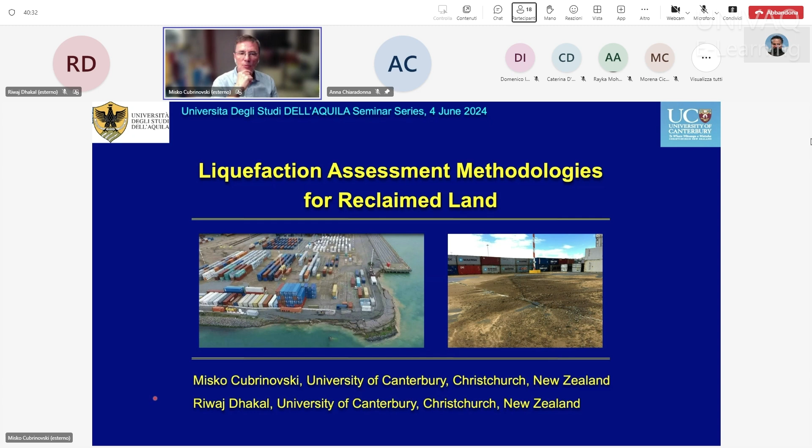Today, together with my colleague Riwaj Dhakal, we are going to discuss some of the observations from recent earthquakes in New Zealand and our studies associated with those, specifically the liquefaction assessment methodologies for reclaimed land.

As Anna pointed out, the presentation will have three parts. I'm going to provide a brief introduction of a case history, which is going to be the basis for this talk: the liquefaction that occurred at the Port of Wellington in a recent earthquake. I'm going to introduce the type of damages that occurred, and we'll provide some details of the composition of the reclaimed soils, which are really at the center of this study.

Then in the second part, Riwaj is going to provide a lot of details around our studies, first to explain the observations using simplified procedures, but then to identify key aspects in the assessment that engineers should really pay attention to. In the final part, I will try to provide some brief concluding remarks and allude to observations from other case histories and other earthquakes and the wider relevance of reclaimed land.

In the presentation, we will principally focus on simplified liquefaction analysis. We will briefly discuss advanced procedures, but most of the discussion will be around issues related to simplified assessment, and in particular we will address issues associated with complex fills, which have a composition of materials different from clean sand, and that poses a problem and challenge in the liquefaction assessment.

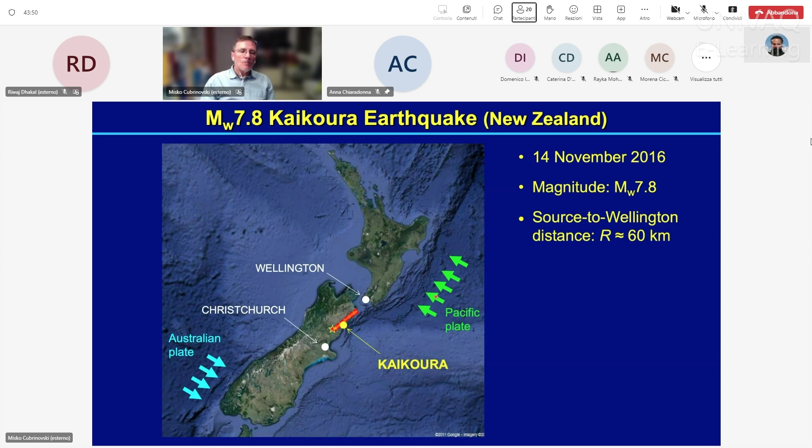Now we are zooming in on Wellington. This is part of central Wellington, and what we are seeing here is the port. This red shaded area is the Port of Wellington, and you can see a number of red symbols - those are strong motion stations where ground motions were recorded, including at this location of the port. This one here is another strong motion station closest to the Port of Wellington, called CentrePort.

Here you can see the horizontal acceleration time history recorded at CPLB. You can observe the peak ground acceleration is somewhere around 0.25 g, and we are seeing a reasonably long duration of strong shaking, exceeding 20 seconds or so, with a number of cycles. But the maximum and peak amplitudes are relatively moderate, so we would classify this as moderate shaking intensity in terms of amplitude, but of significant duration.

Top right, you can see acceleration response spectra for three different classes of soils. This black circle indicates a location which is on rock, essentially a rock or nominally rock site, and the black solid line indicates the response spectrum for the ground motion observed there. Relatively low spectral accelerations, with peak ground acceleration of about 0.08 g, just 8% of the gravity acceleration - a low acceleration on a rock site.

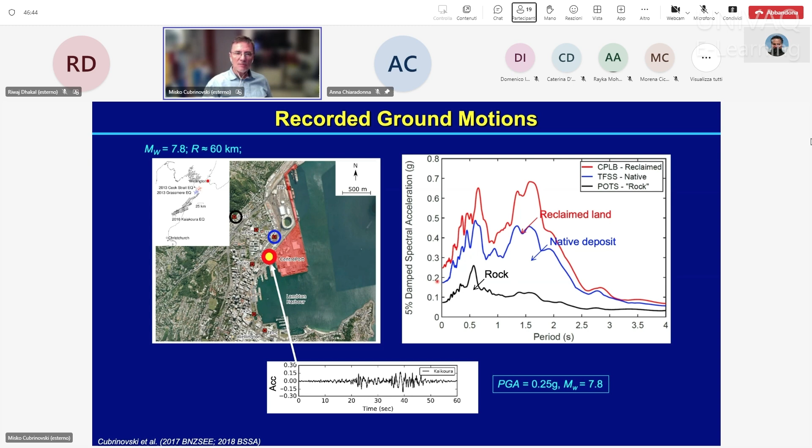And this shaking produced significant liquefaction at the port. Before I describe the typical damages we saw at the port, let me briefly introduce the land reclamation history at the port. This dashed line here indicates the coastline in the 1850s, almost 200 years ago.

Since then, reclamation efforts started and were performed in three phases. In the early periods, some small-size reclamation works were performed. Then in the early 20th century, more significant reclamation was performed, predominantly in this gray shaded area. In that period, hydraulic placement was frequently used, especially for this large area, but end-tipping of gravelly materials into the sea was the alternative method used for smaller reclamation works.

Then in the third phase, from approximately 1965 to 1976, this part was reclaimed, now known as the Thorndon reclamation. This is the thickest fill, and much of this discussion will focus on it. So in Wellington, along the waterfront, there is a belt approximately 200 to 500 meters from the current revetment line which is reclaimed land. On these reclaimed soils there is very significant infrastructure, and this is one of the most beautiful areas of the city, so clearly the performance of reclaimed land during earthquakes is extremely important for this city and for Wellingtonians.

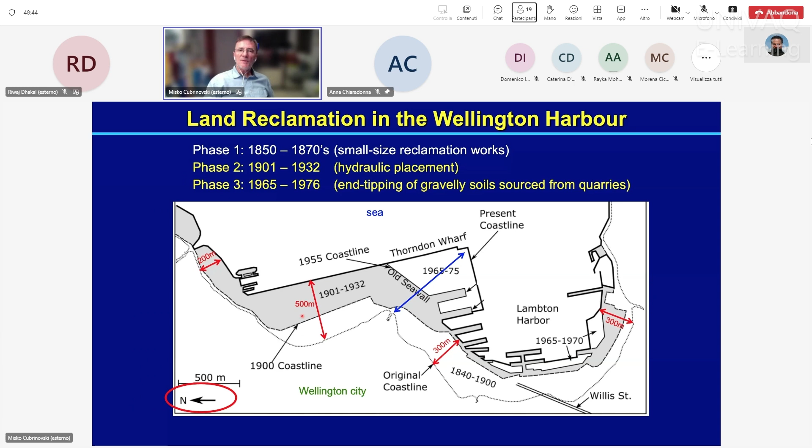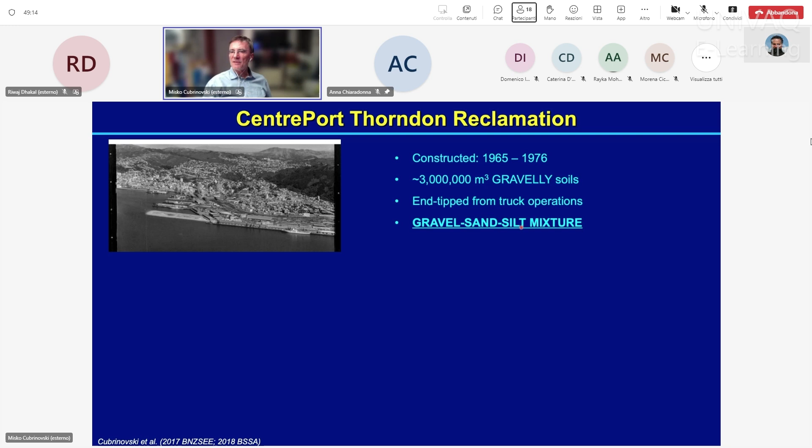So let's see what the construction of the Thorndon reclamation involved. You can see an old image from the time of construction - approximately 3 million cubic meters of gravelly soils were dumped into the sea through truck operations. Local materials were used from nearby quarries, which were essentially a gravel, sand, silt mixture. So the material was just dumped into the sea, and this kind of reclamation fill was constructed, as indicated here.

On three sides of the reclamation there is sloping ground - actually there is no retaining structure, just a slope of 1.5 or 2 to 1. So modestly, gently sloping ground on three sides of the fill.

On the northern side is confinement provided by an old retaining structure. This Thorndon reclamation, composed of gravelly soils, is quite thick, from approximately 10 to 20 meters thickness. It is essentially laterally unconfined except for the northern side, and it is not compacted because the soils were simply placed under the sea.

When the soils surfaced above the seawater, they used rollers to compact the top 2 or 3 meters. This orange layer represents that compacted surface soil. The yellow layer is the gravel sand silt mixture, which was not compacted. As Riwaj will show later in detail, the reclamation is mostly composed of this gravel sand silt mixture, but there are also zones where relatively cleaner sands were used. This blue area indicates such a sandy zone.

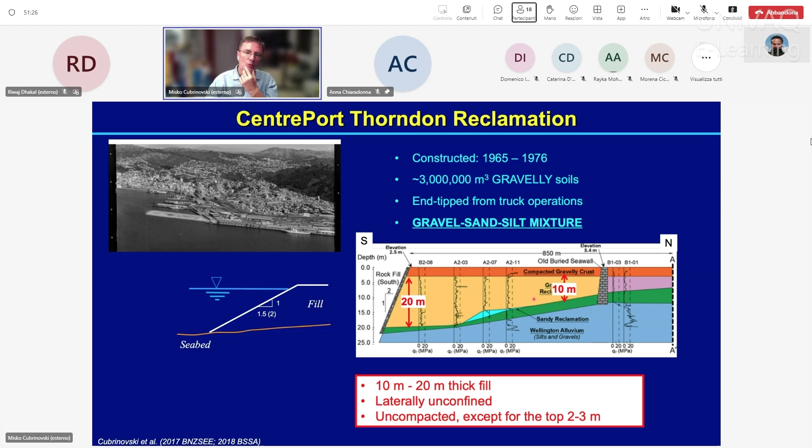The green layer is the marine sediment, the original native marine sediment layer on top of which the fills were constructed. The blue area is the zone of native alluvial soils, interbedded gravelly, silty and sandy layers that propagate towards deeper parts of the strata. These are the essential characteristics, and we'll focus mostly on the performance of the Thorndon reclamation fill, especially the performance of this gravel sand silt mixture.

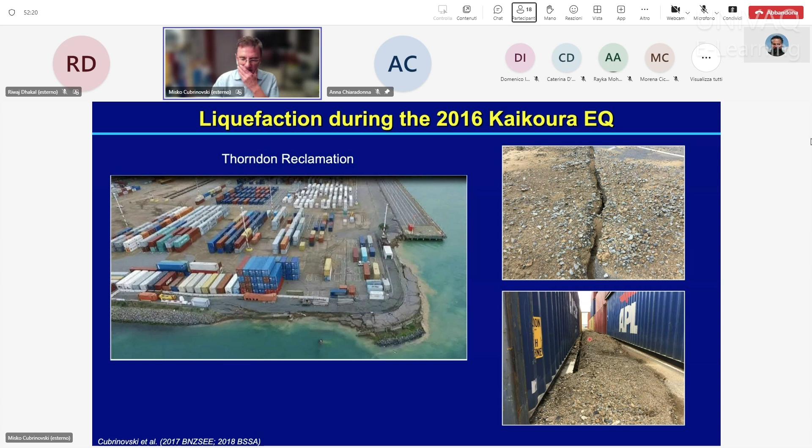A close-up view shows the ejected material is really a mixture of larger particles, gravels, sand, and silt. Typically, the ejecta occurred close to cracks or drainage pathways that provided an easy route for the ejecta to reach the ground surface. You can see a pile of ejected material along the containers at the port.

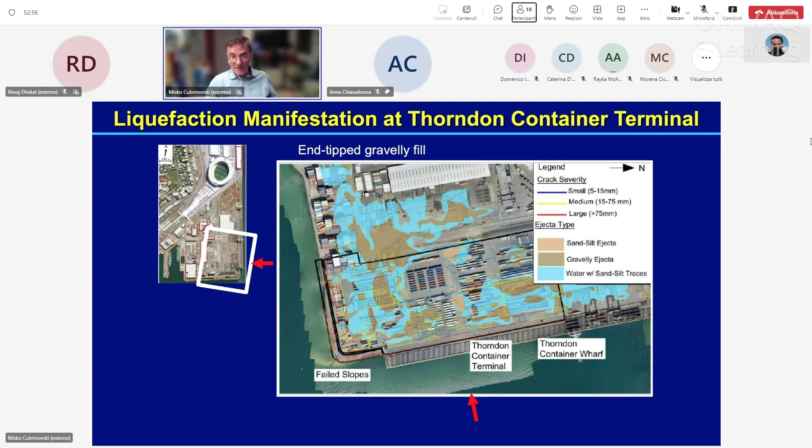This is an aerial view of the Thorndon reclamation, schematically indicating how liquefaction was manifested. The blue painted area is covered by water, the brown painted area is covered by gravelly ejecta, and the light brown is covered by sandy ejecta. At a couple of locations, sand was the dominant ejecta material, and these are areas where in the deeper part of the fills there is a prevalence of sandy soils, which is why we see sandy ejecta there.

Let's see now how liquefaction was related to the observed damages, using a simple schematic to indicate what happened. This is the pre-earthquake geometry. Due to elevation of excess pore water pressures and reduction in effective stress in the fills caused by liquefaction, there was significant loss of stiffness and strength, and as a consequence, large movements and displacements were seen.

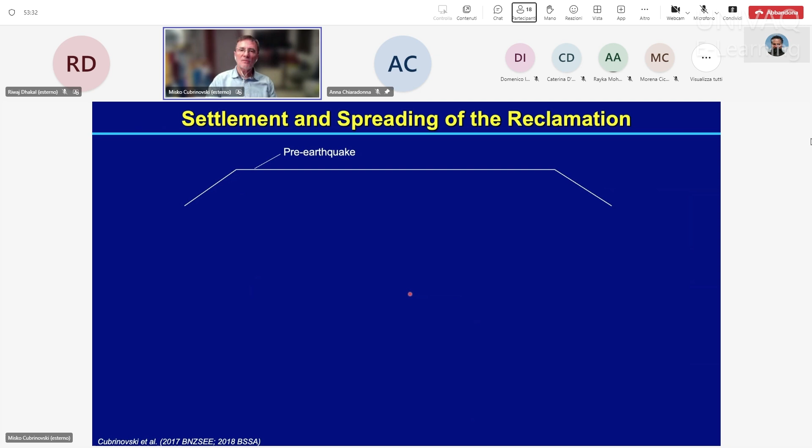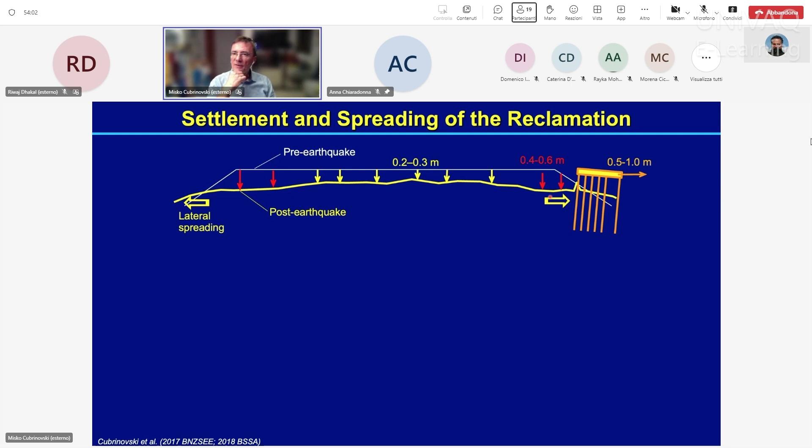A key deformation pattern shows settlement of the fill: approximately in the center part it was about 20 to 30 centimeters, and close to the edges it was half a meter or even more. This slumping due to liquefaction in the fills was also associated with lateral movement, so lateral spreading occurred towards the sloping ground, and this pushed the wharfs, which were supported on piles, half a meter to a meter towards the sea.

You can see the offset created between the settled reclamation fill, indicated by yellow here, and the top of the wharf, which didn't settle much because it's supported on piles - this offset was quite significant. Here is the interface: this is now the surface of the wharf, and this is the surface of the reclamation. Obviously, before the earthquake, that was level ground.

So quite significant damage was induced at the port. The port was out of operation for a while. The gantry cranes, which you cannot see but are on top of this wharf, were out of operation for 10 months. As a critical facility servicing the capital of New Zealand, that was a quite significant impact due to the liquefaction induced in the reclamations of the port.

What you're seeing here is the distribution of ground displacement due to lateral spreading. On the vertical axis is the magnitude of ground displacement in meters, and on the horizontal axis is the distance from the edge of the reclamation. So from this point, we're moving to the right, for example, about 200 meters.

You can see that the displacement at the edges was somewhere from half a meter to a meter. These are summary results from measurements at four different locations. You can see a gradual reduction of the horizontal permanent displacement due to spreading. The spreading affected an area of approximately 100 meters with very significant displacements, and further up to 250 meters.

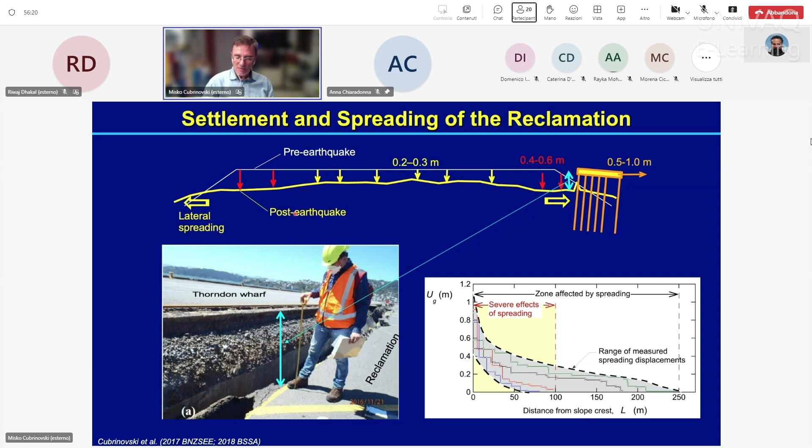Smaller displacements due to spreading were observed, and this is kind of typical. When liquefaction is associated with spreading, we see damage typical for both loss of stiffness and strength, affecting different foundations, producing a lot of settlement, and lateral spreading imposing very large lateral displacements, which additionally damage the land and structures. So these are some typical damages.

Top left is a schematic view of the cross-section of one smaller building on shallow foundations, which was in the spreading area. As indicated here, the spreading produced a stretch of the ground of approximately 30 centimeters, with pretty much ruptured and extended the foundation at the foundation level, producing some structural damage as well.

Top right is a view of the top of the piles of the Thorndon Wharf, where you can see substantial damage occurring just beneath the deck at the top of the piles.

Down to the right, you can see an area of a building, part of a building supported on piles, this one to the right, and the reclamation area is where the original reclaimed fill is. You can see an offset of approximately 0.4 meters. Obviously before the earthquake this was level ground, so this was a typical manifestation of a large vertical offset between the pile-supported area and the reclamation, which suffered quite significant settlement due to liquefaction.

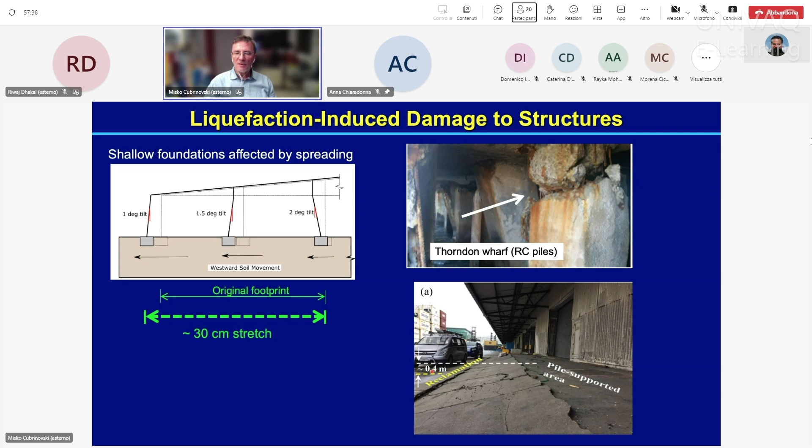So this is just a brief introduction of the type of damages that we were seeing at the port. Before I give the word to Riwaj to continue, let me introduce some important aspects to consider in the assessment of the type of soils that we encountered at CentrePort.

I will start with some general remarks about how we assess liquefaction in the profession using the simplified method. We use empirical relationships, and you can see such an empirical relationship shown here by the black line. This is a CPT-based empirical relationship that allows us to estimate liquefaction resistance of soils if we know the cone tip resistance.

If we perform a CPT, for any given depth we can calculate this parameter, which is the equivalent clean sand cone tip resistance. If we know that value, let's say it is 100, we can go to the intercept with the black line and read off the liquefaction resistance, which will be CRR, roughly 0.15. So for a layer with that QC1NCS, we estimate the typical liquefaction resistance. This is how we use the relationship in a simplified assessment.

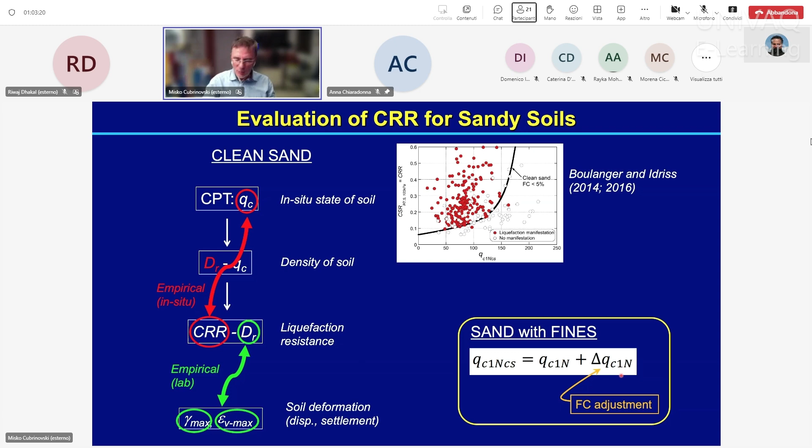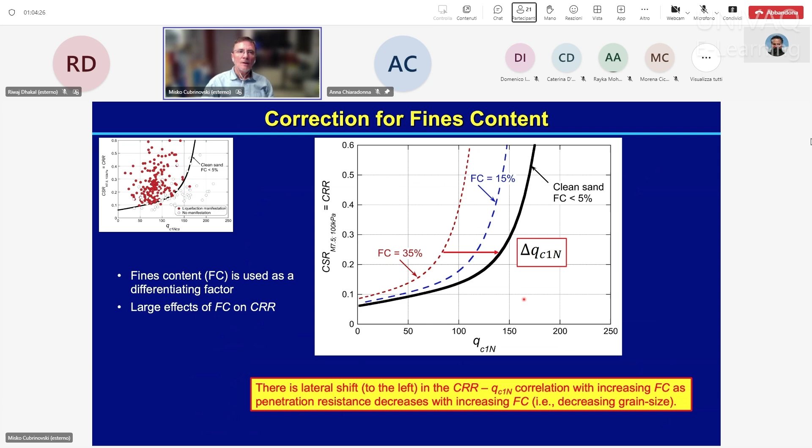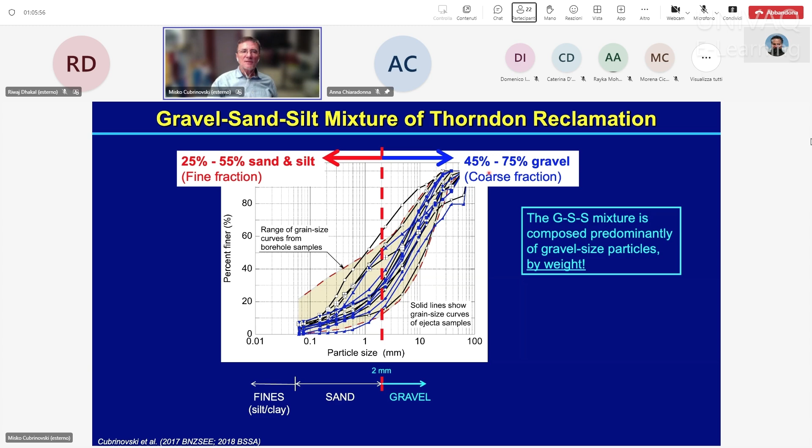So this is one issue: how are we going to deal with this difference in materials? As I mentioned, we have established procedures for clean sands and sands with fines. If we are dealing with a gravel, sand, silt mixture, we should expect several important effects of this material. The first is on the packing of soil—what will be the role of gravel in the sand silt mixture? Which fraction is going to dominate the material? Is it going to be the gravel, so we see liquefaction resistance typical for gravelly soils, or is it going to be the sand silt mixture? That is a very important question, and we will be focused on that.

The second is, once you have large and smaller and even smaller particles mixed together, they all show different penetration resistance, because we know grain size affects penetration resistance. So the next question we have to consider is how this composition of soil is going to affect penetration resistance. That is quite an important question, because we use penetration resistance to estimate density of soil. Since liquefaction resistance is directly linked to density, clearly any change in penetration resistance or change of density will implicitly imply an effect on liquefaction resistance.

So in our studies, we try to address these following questions, and Riwaj will shortly provide many details around those. First, what is the controlling fraction in the soil matrix? Is it the gravel or the sand-silt mixture? Second, the effects of soil composition on penetration resistance, and what will be the consequent effect on the estimate of the in situ state of soil, or the estimated relative density of soil. Finally, we were trying to see what effects considerations of those, or lack of considerations, are going to have on the computed liquefaction resistance when we use simplified procedures.

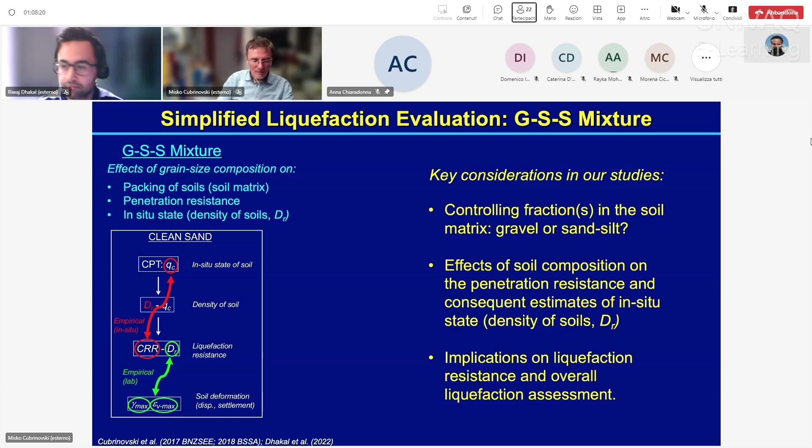Okay, yeah, thank you very much Misko. Just checking that my mic is working. Great, thank you so much. Thank you so very much Anna for the introduction, and Misko for leading us on.

So I'll continue as part two of our talk on liquefaction assessment methodologies for reclaimed land. In particular, I want to focus on some of the characterization issues that Misko has highlighted, looking at more detail in the soil composition, and then some of the in situ testing we have done at CentrePort in relation to those key considerations.

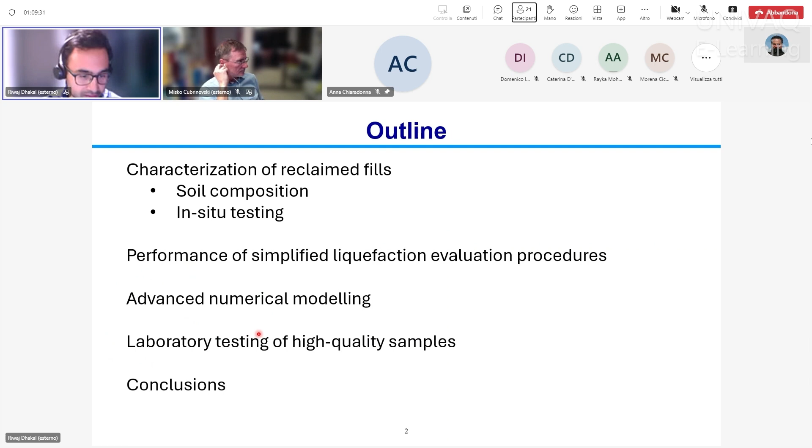We'll look at performance of existing simplified methods, and highlight key considerations one might have to account for in general engineering practice when applying them to these types of gravelly mixtures, before looking at some more advanced methods, using numerical modeling and lab testing to supplement our understanding. Then I'll conclude and hand it back to Misko.

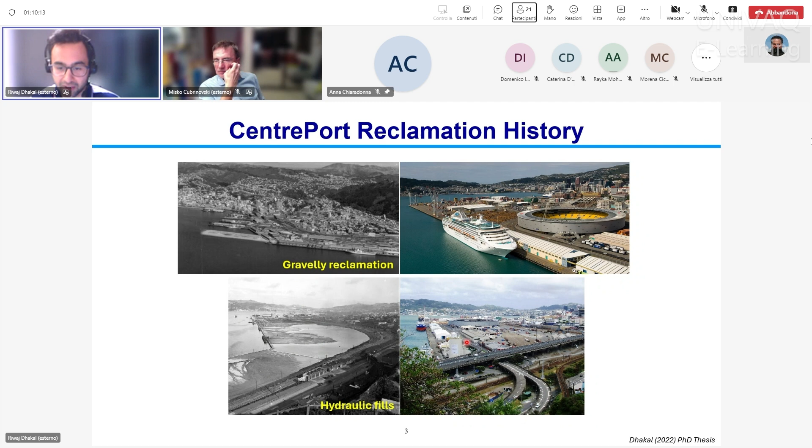As Misko pointed out, CentrePort is quite interesting. There are two key types of reclamation areas we're studying. The top one shows the gravelly reclamation. On the left is a historical photograph from when the reclamations were being constructed, and this is what it looks like today. You can see the southern end of the port where Misko was showing some of the damage. On the bottom left you can see some of the hydraulic fill areas, and this is what it looks like today, with quite a lot of urban development, again highlighting the importance of these areas and studying the ground properties.

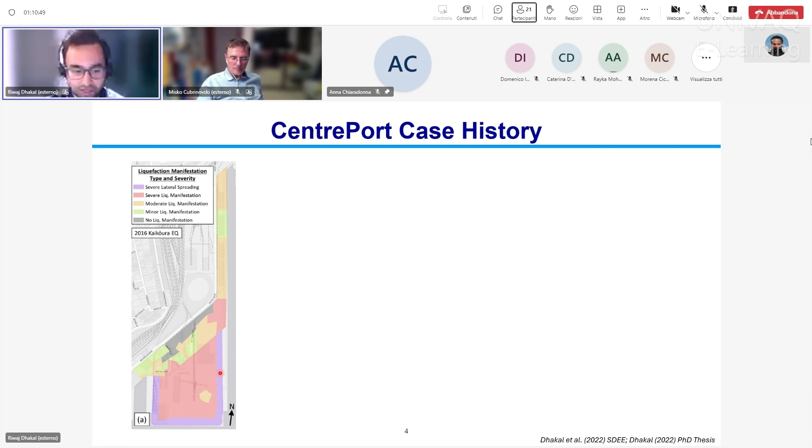On the left here is a damage map, which I'll use as a basis to start our discussion. This is a map of the liquefaction manifestation severity observed after the Kaikoura earthquake, collating information from aerial photographs, ground photographs, drone images, and LiDAR aerial surveys that Misko was showing, summarizing the damage observed on the ground surface. The different colors indicate different severity of damage: red is severe, yellow is moderate, green is minor, and gray is none. There's also this purple region where there was severe lateral spreading type effects.

We can see here the Thorndon reclamation, characterized by these gravel-sand-silt mixtures, largely had poor performance. Misko suggested some of the key features that might have contributed to that: the fills are thick, the edges of these reclamations are unconfined, which perhaps led to some of the lateral spreading, and the deposition was largely in a loose state with uncompacted fills.

And of course we have this other area as well, the hydraulic fills. These are a whole different set of issues we'll touch on at the end, relating to fines content and plasticity. It's also of interest to us because we saw varying manifestation performance. In the hydraulic fill area, you can see some colored in red, some orange, some green, and some gray - quite large variation in performance. This gives us a nice case study to understand the roles of the fines, plasticity, and profile characteristics in its performance.

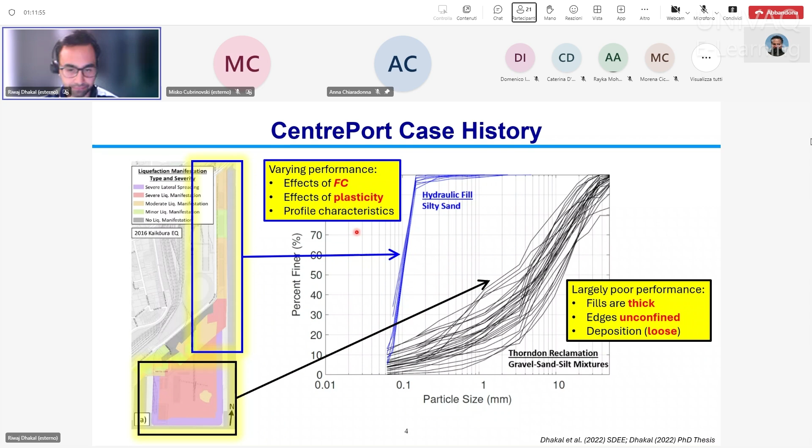So let's take a look at some of the characterization. Here I'm plotting again.

This is the third time I'm showing it, but again, these black lines are showing those grain size compositions. I just wanted to show as well the case studies from a couple of other well-studied case histories. One is Port Manta from 2016, and one is Kobe Port Island from the mid 1990s.

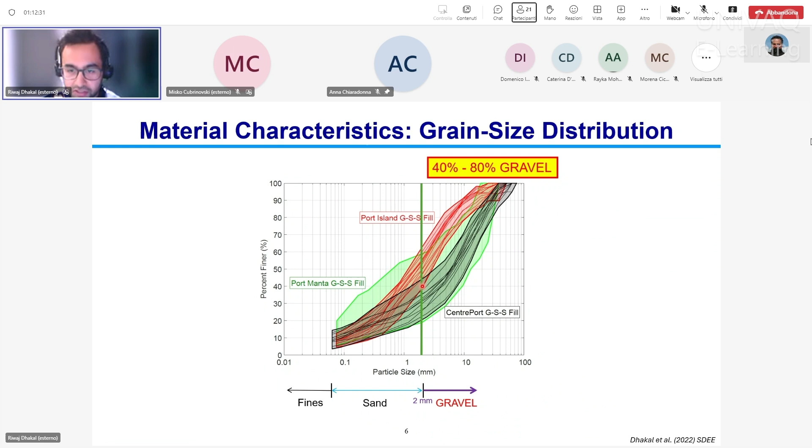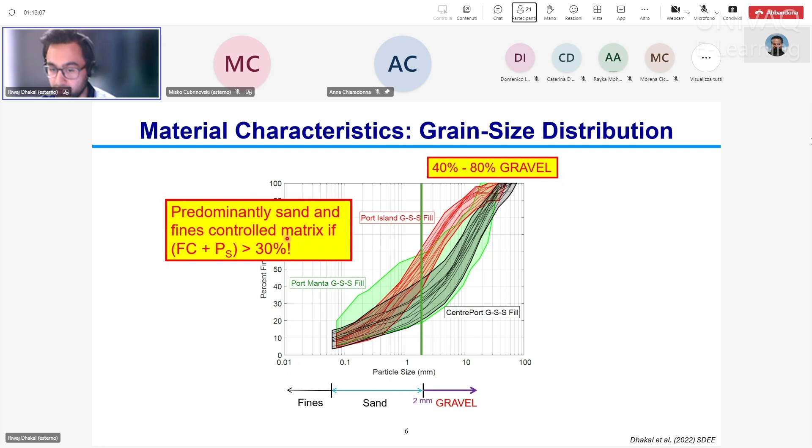All three case histories saw liquefaction occur in port gravelly fills. As Misko pointed out, some of the key features of these case histories is that they are 40 to 80% gravel by weight. However, lab studies have shown it's important to recognize that when you have a well-graded mixture with varying grain sizes, the finer fractions can control the matrix if they compose at least 25 to 30% by weight. In other words, despite being largely gravelly in composition, there's sufficient fines and sands to control the mechanical response of these fills, and we'll show that manifesting in some of the CPT data as well.

So with that in mind, in 2017 to 2021 or so, we performed over 100 CPTs throughout the port. On the left here, I'm showing a map view of CentrePort. The blue shaded region shows the Thorndon reclamation where the gravelly fills are, and these red dots show individual CPTs performed in the fills. These were performed using standard 10 square centimeter and slightly larger 15 square centimeter cone heads.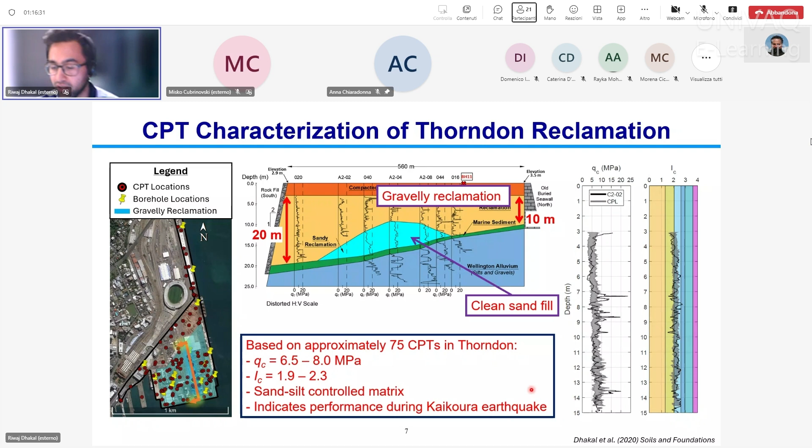So it's suggesting that these empirical methods are actually correctly estimating liquefaction to trigger for this earthquake, for the Kaikoura earthquake in 2016.

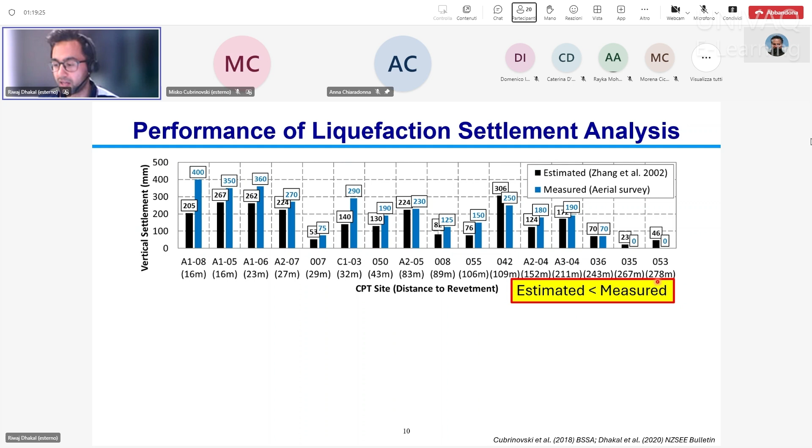The second key observation is when we look at the sites closest to the edge of the revetment, you can see there's much larger underestimation. For example, if you look at the leftmost case, we're off by a factor of 2, estimating around 200 millimeters of settlement when in fact we observed around 400.

This is perhaps reflecting the fact that these sites near the edge are not really free field sites per se. So really the data is revealing what we had observed with our reconnaissance as well. With that in mind, while these triggering analyses are performing reasonably well, we can start isolating areas where it perhaps breaks down.

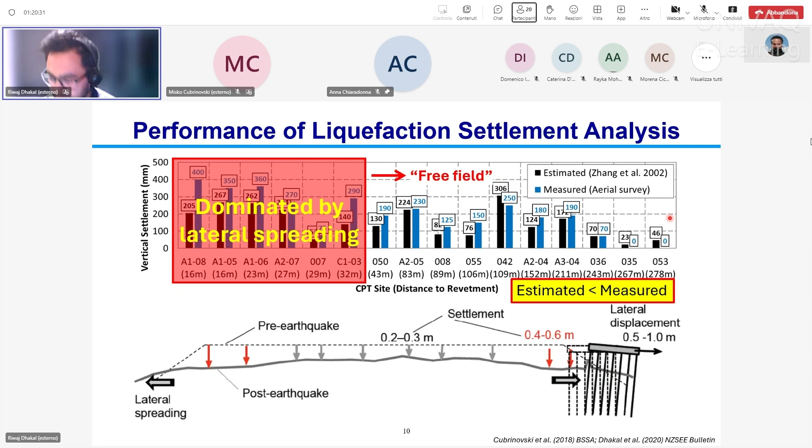One of the key issues we looked at was state characterization, and in particular the effects of particle size on penetration resistance, and the effects of grain size distribution on the penetration resistance to relative density correlation.

To dive into further details, let's look at some data available in the literature. On the left here are typical correlations that one might use in engineering practice, three sets of curves shown with three different lines, all developed using soils that are silty sands or clean sands. These align with the case histories used to develop the triggering procedures, and you can see that as QC1 increases, as penetration resistance increases, our estimate of relative density also increases, and all of these data pretty much fall in this band of lines shown on the left.

On the right side, I'm showing a set of curves from another study, from Cubrinovski and Ishihara, 2002 and 1999, where they developed curves using a wide range of soil types. Rather than just using sands, they also included silty sands, some silts, some gravels, and gravelly sands. So now we're looking at a wide range of soil compositions and seeing the effects of soil composition and its packing characteristics on penetration resistance and its correlation to relative density.

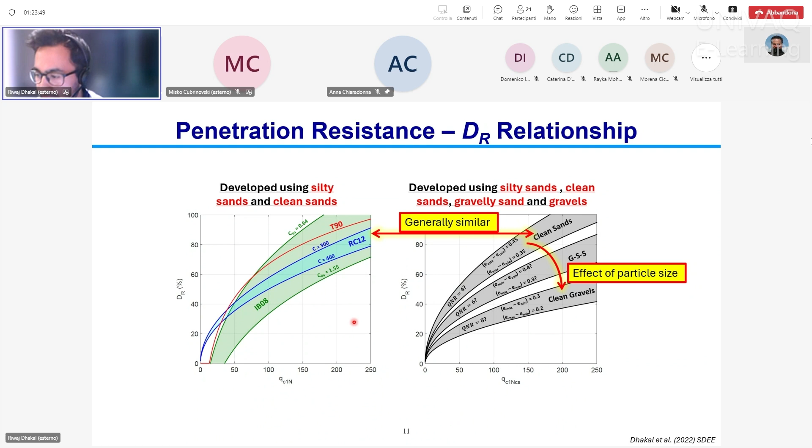So the question is, what implications do these have for the simplified procedures? Let's take a look at one example to illustrate some of the effects one might see.

Here I'm plotting one of the 75 different profiles we have in the Thorndon reclamation, plotting profiles of QC, the cone tip resistance with depth. We're seeing typical values of around 6.5 to 8, as before, with isolated spikes, and the fill ends at around 15.5 meters, with Ic values of around 1.9 to 2.3, just as before.

The third profile is showing estimates of relative density using two different correlations. The red line, using this correlation on the left, gives relative density estimates of around 55 to 70%, which is medium dense to slightly larger density estimates. Whereas the gray zone, which accounts for the different grain size packing characteristics, with the range reflecting uncertainty in our Emax and Emin values, suggests that relative density estimates are actually around 30 to 50%.

This has consequent effects on calculating settlements. Misko suggested that these relative density estimates will affect calculation of strains and therefore settlements. If we use the traditional sand-based methods, one would estimate settlements of maybe around 20 centimeters, whereas using one that captures the effect of particle size on penetration resistance might actually reflect something around 40 to 50 centimeters, perhaps closer to what was measured at the site.

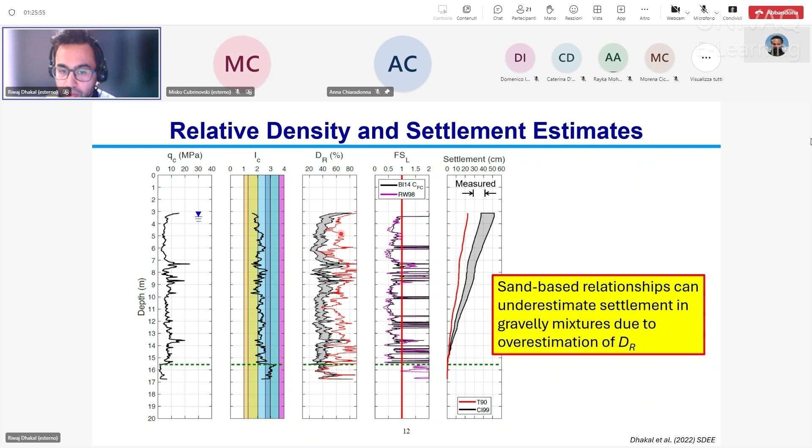The key conclusion I want to take away from this is that sand-based relationships can tend to underestimate settlement in gravel sand silt mixtures, due to overestimation of relative density. So the characterization of relative density is quite an important detail in these types of problems, particularly given that we have quite large settlements, and we were seeing some underestimation of settlements as well.

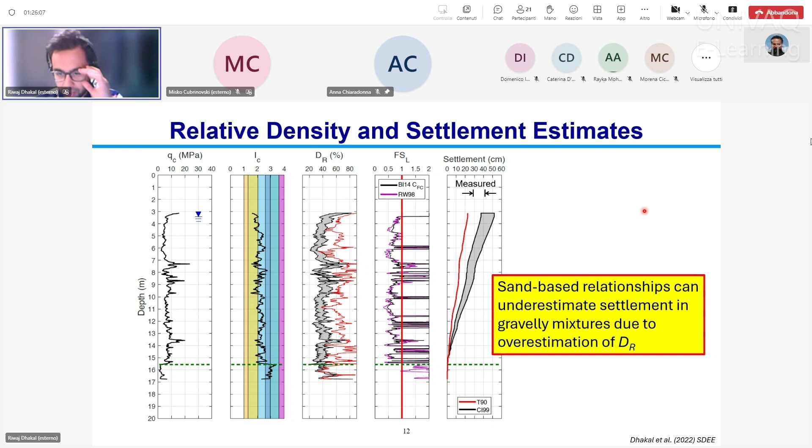That's hopefully a quick overview of some of the simplified procedures. We're seeing if we can get some additional insights from advanced numerical modeling as well, so I'll spend a few slides covering some details from the advanced modeling we've been doing.

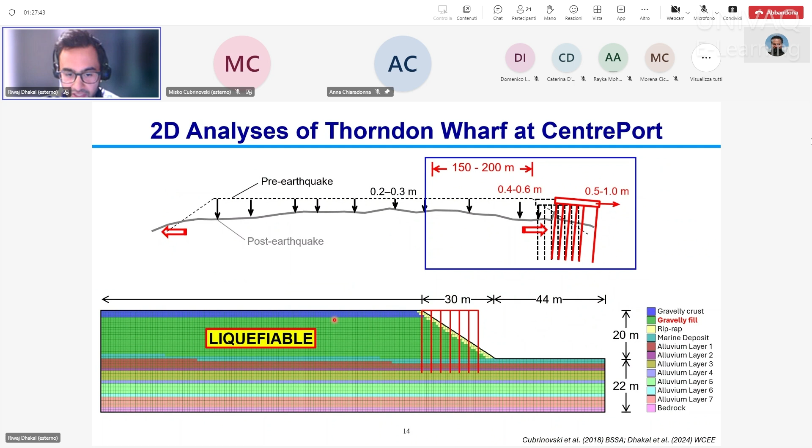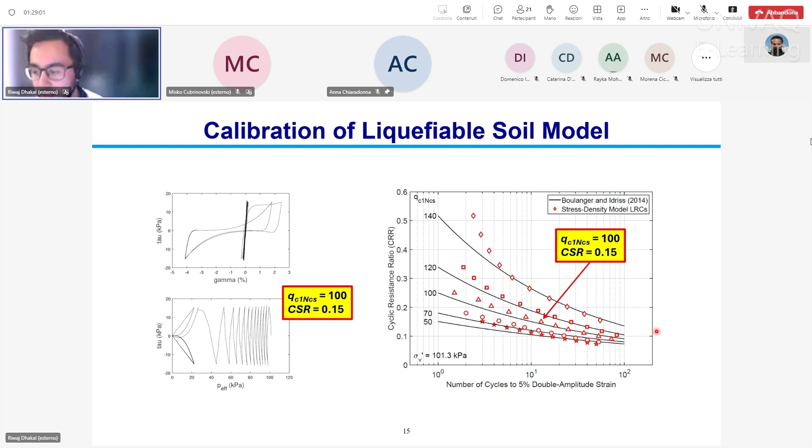In our numerical modeling, we calibrate our constitutive model parameters to capture these curves as closely as possible. We can see here a single element simulation performed on one case, giving us this triangle point shown by the arrow, and we would repeat these for a range of cyclic load demands and relative densities to capture these curves as closely as possible. So that's the first detail in our numerical modeling, the liquefiable layers.

For our deeper non-liquefiable layers, it's important to capture the general shear strength and degradation of stiffness characteristics. Some of us that have looked at earthquake engineering problems have perhaps done this in a total stress sense, but essentially we're trying to capture the estimated strength and degradation of stiffness, and even empirical estimates are sufficient in this case.

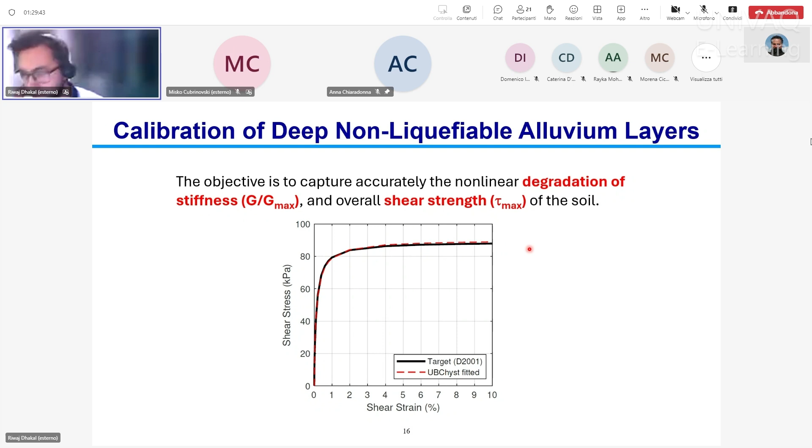In this case, we're looking at one layer. The black line shows one of the target stress-strain curves we might want to capture, and the red line shows our numerical model trying to capture that curve as closely as possible. So that's our calibration of the non-liquefiable layers.

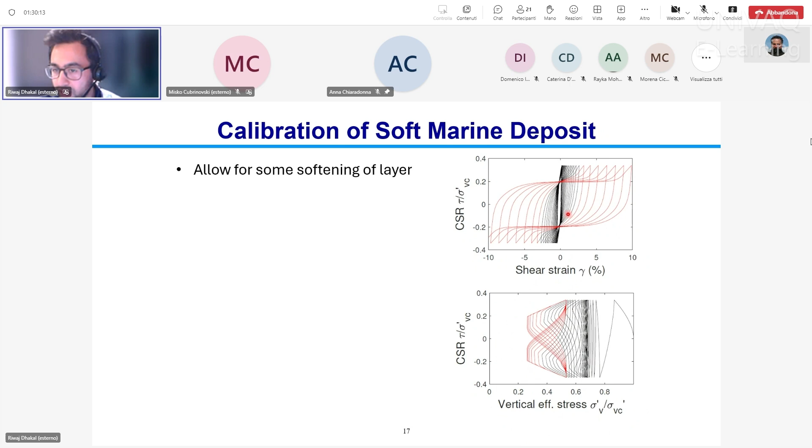Finally, we want to also calibrate our soft marine deposit, so in this case we're allowing the model to actually develop some excess pore pressures. You can see here that the vertical effective stress on the x-axis of this bottom right plot, while it does decrease as we load that element, doesn't decrease to completely zero, which is typically what you observe in these finer, softer soils, also associated with further degradation of stiffness as you load it.

The final key consideration is input ground motion. We were looking at some of the strong motion stations, and Misko showed some of those spectra as well from a rock site, a site on native deposit, and a site on reclaimed land. We want to use these sites as potential input ground motions, as a realistic input motion for our numerical model.

And so the key here is to take some of these motions. So in this example, if we were to take, say, the VUWS motion, deconvolve it to an equivalent bedrock motion, convert it to an equivalent outcrop motion, and use it as an input in our numerical model, then perform our site response analysis, which will give us our results.

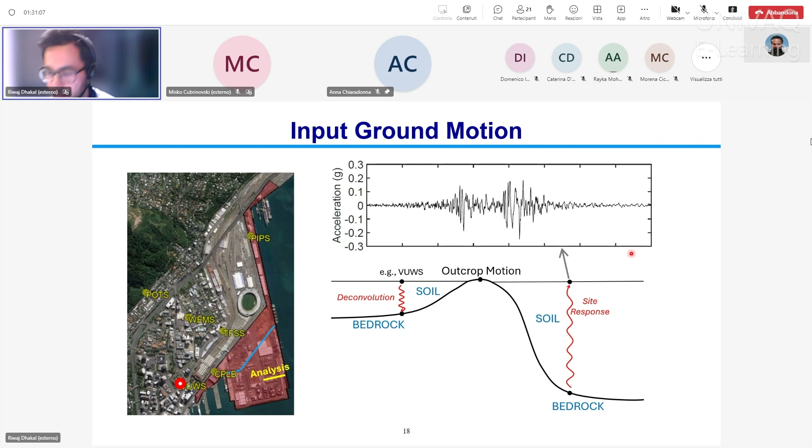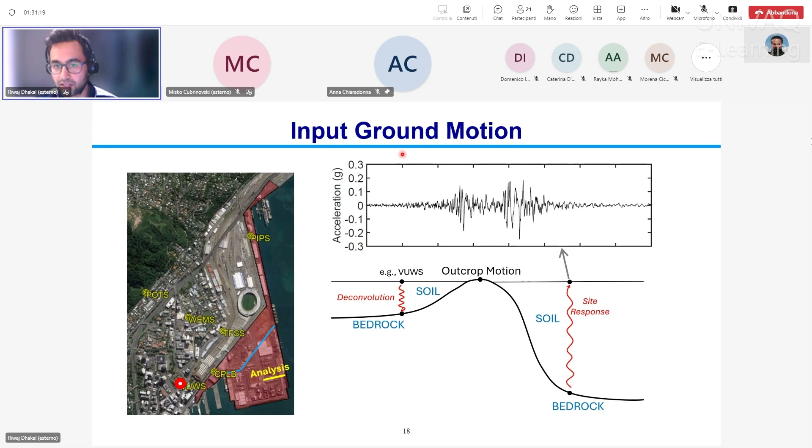So this type of approach will give us a realistic input ground motion, which will then be used to give us an output in terms of our analysis as well. So a key consideration in our modeling is input ground motion selection.

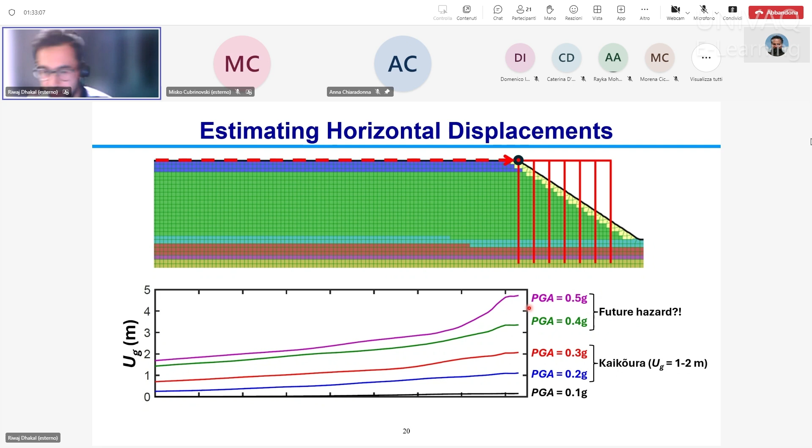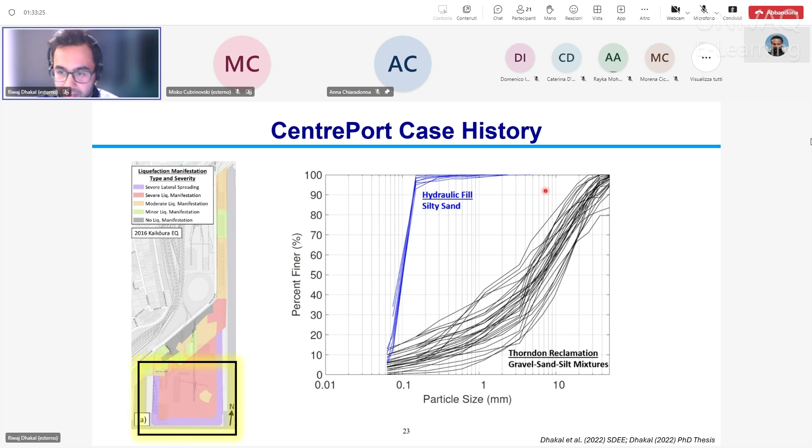I won't go over this in detail, but I want to cover the last thing as well, some of the laboratory testing giving us further insights in terms of the hydraulic fills. So until now, we've been looking at analysis of the Thorndon reclamation, these gravel sand silt mixtures, but also of interest are the hydraulic fills here with issues regarding fines and plasticity.

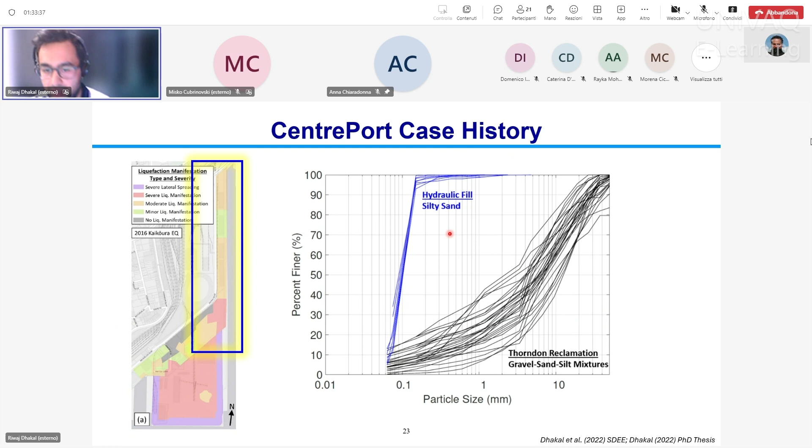And so I'll spend a couple of slides looking at some of the laboratory studies we've been doing to gain insights in terms of its performance. By and large, a lot of the effort has been looking at sampling of soils for testing back in the lab. So we go out onto the site with drill rigs.

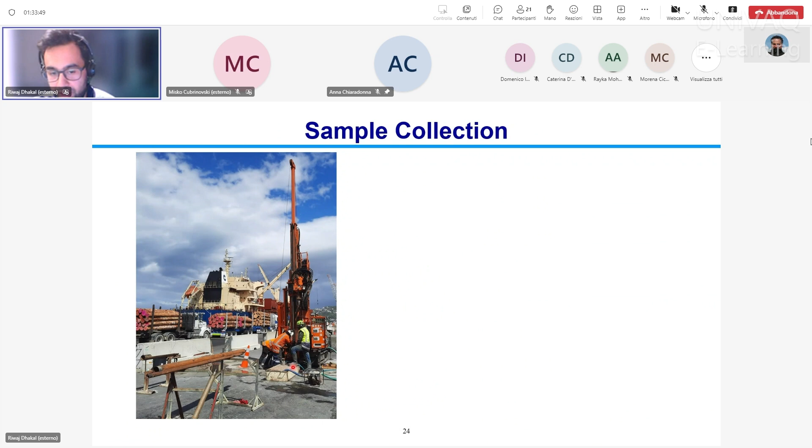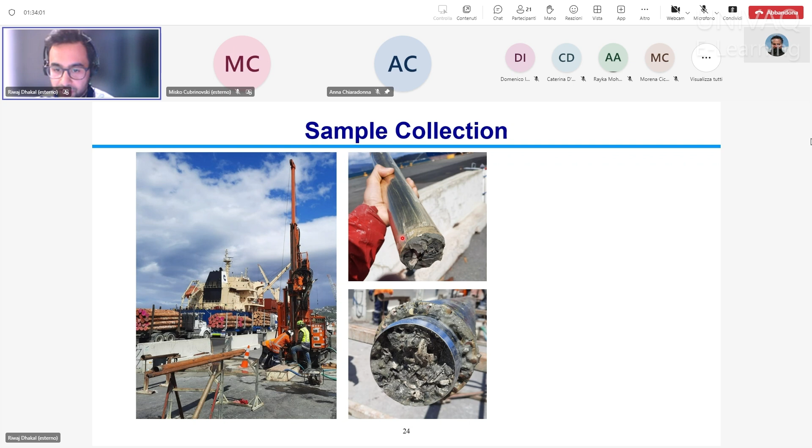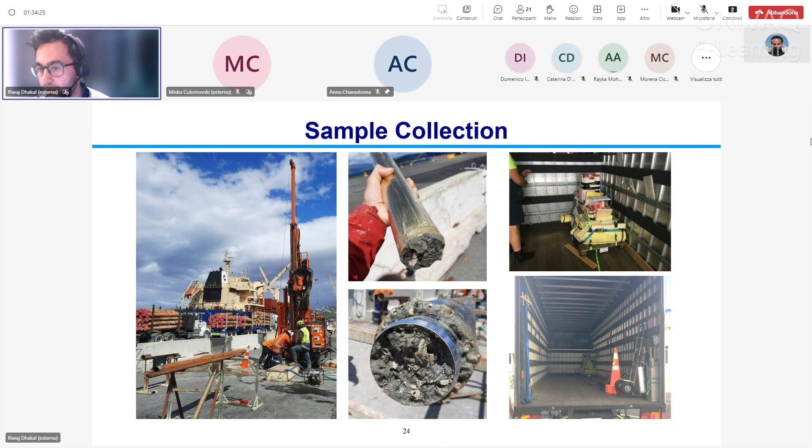Contractors will drill the soil out, extrude the soils. We have either high fines content or very soft soils, and some soils that are more sandy or shelly, and then transport them back into the lab. A lot of effort is placed into making sure these samples have minimal disturbance. You can see, for example, foams around the edges of the soil tubes, perhaps allowing for more damping of some of the energies that might be imparted during transport, so that when we're taking them into the lab, they have minimal disturbance.

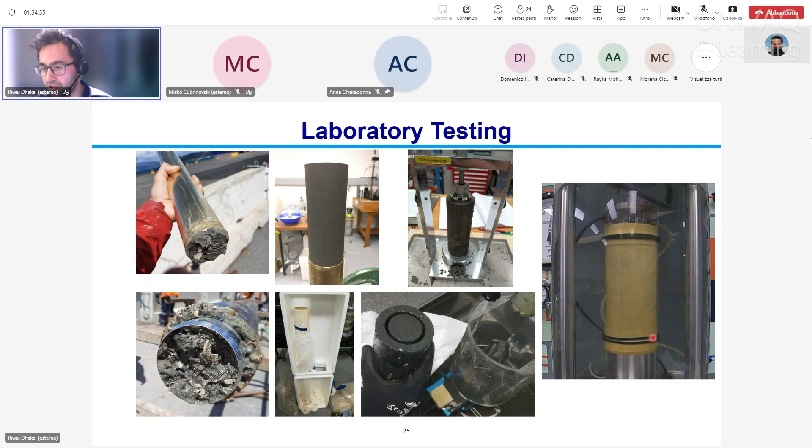The ultimate goal is to then test them into these triaxial devices. We take these devices and try to test them. For the case of the finer soils, we extrude them, trim them down, and test them in the triaxial device. Whereas for the sandier soils, we freeze them, core them, and then test them into the triaxial device as well, which will cyclically load, as you can see in the video, and measure strains and deformations and responses in terms of pore pressures and changes in these stress states.

So these are some of the testings that we've done. And just to give you some typical results that we see, this is a typical result of one of the fine-grained samples.

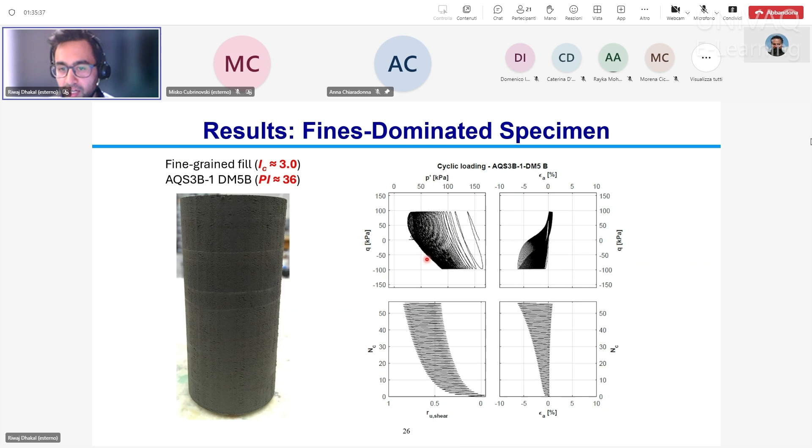So here, for example, is a fine-grained specimen. This is where I sub C of around 3 was observed, and the plasticity index of around 36. We can see the vertical effective stress reducing with loading cycles, and just like we saw in some of the numerical modeling, we can see here that the effective stress does not drop all the way down to 0, which is typical for fine-grained soils.

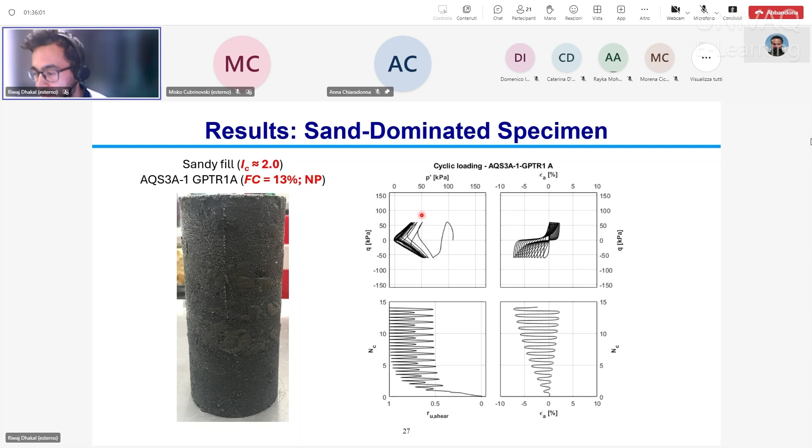Whereas if we look at a result for a typical sandy fill, where I sub C was maybe around 2, we can see that the vertical effective stress drops all the way down to 0 with typical butterfly loops. So we can start seeing the effects of perhaps a high plastic soil versus a specimen that has no plasticity with lower fines content, and start characterizing the difference in terms of the behaviors as well.

Just to finish my part, just to recap again, the liquefied gravels at CentrePort had very important characteristics in that though they had 40 to 80% gravel content, they had 20 to 60% fines and sand content, and this is quite important as that's sufficient for the finer fraction to control the matrix behavior of the soil. We saw that CPT data illustrated the dominant influence of the finer sand-silt matrix and illustrated the fact that these fractions tend to control the mechanical response of the fills.

And the liquefaction assessment results are consistent with observations by and large for the Kaikoura earthquake, though we did highlight some of the limitations and some of the reasons those limitations are observed.

We've highlighted characterization of relative density as a key issue in the CPT-based methods, and we also highlighted some of the issues in terms of traditional correlations of relative density with CPT penetration resistance, and some suggestions and alternative methods that one can use, compared to what is traditionally done in practice, to estimate relative density and its consequences on settlement.

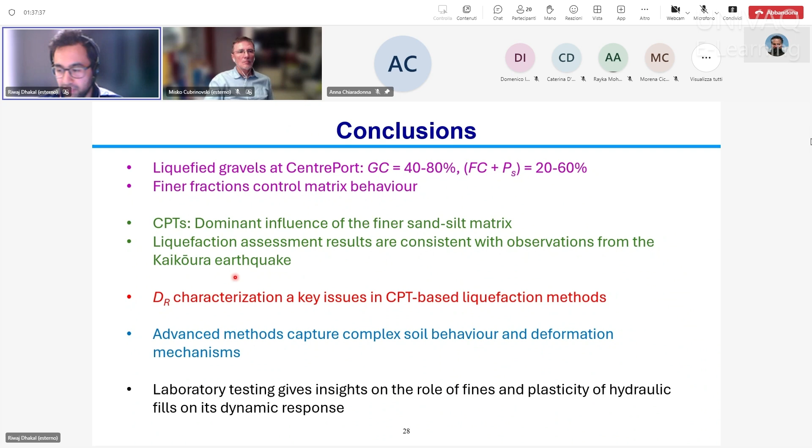We then quickly touched on advanced methods to capture complex soil behavior and additional deformation mechanisms that simplified procedures cannot capture, and then gave you an introduction to some of the laboratory testing we've been doing to give insights on the roles of fines and plasticity of hydraulic fills on its dynamic response as well. So a whole heap of issues that we're covering, but hopefully it gives you a quick insight into some of that work.

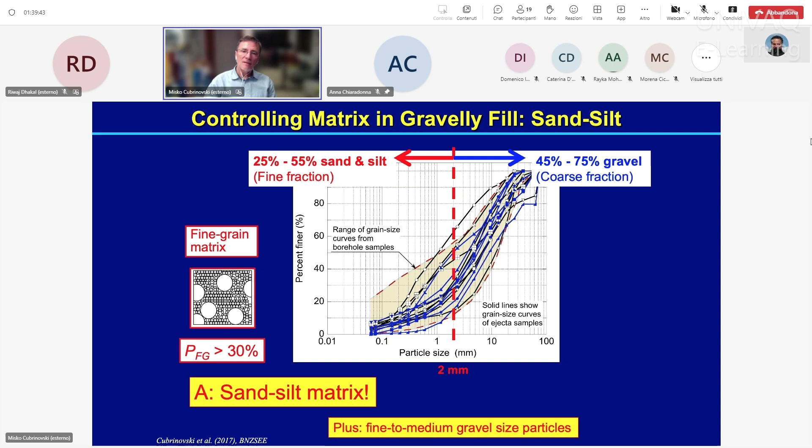Gravel particles cannot be seen because there are too many small particles. So it's not really the weight of the particle itself, but the number of particles surrounding a given gravelly particle, which essentially results in this kind of matrix. That is why sand and silt control mechanical behavior, meaning they control the effective stress path, cyclic resistance, and how strains develop. That's why it's important to identify the controlling matrix in these complex mixtures.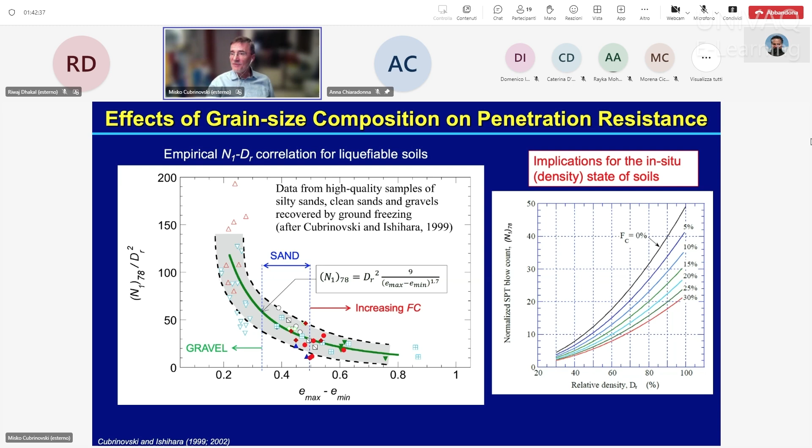This is very important because we use penetration resistance in subsequent simplified analysis to estimate relative density and then estimate settlement. If you use empirical relationships for clean sand, the settlement estimates will be smaller than if you use relationships that account for the complex mixture. So grain size composition affects the matrix, key behavior, and also the state of the soil in terms of density, which is a key input in liquefaction assessment. We need to modify the relative density of the soil to account for the complex composition, then apply methods based on clean sand.

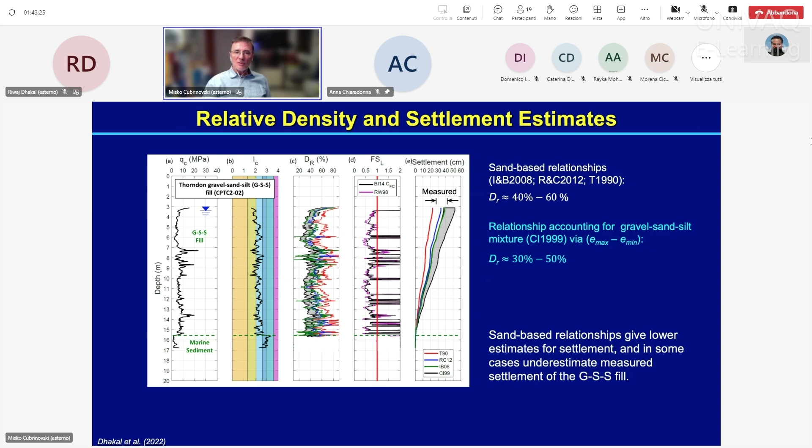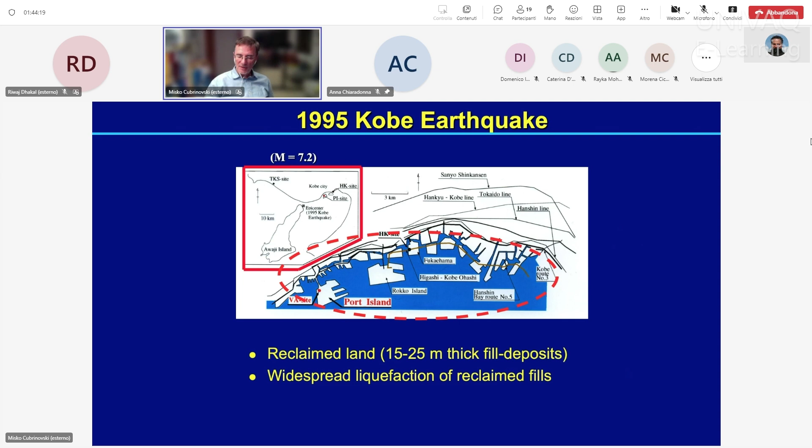I'm going to show you a few images from Port Island because we've spent a lot of time studying it. I performed studies for 10 years on this earthquake. Let me show you a few characteristics of the soils and damages at Port Island. This is an aerial view of Port Island, about 4 kilometers by 3 kilometers, so it's quite a large island. The yellow painted area is covered by ejected materials, mostly gravelly soils, as we'll see shortly, very similar to those at Wellington Port.

There was a vertical array, so the ground motion was recorded at Port Island, giving us excellent records and a lot of great, well-documented case histories on the performance of different types of structures.

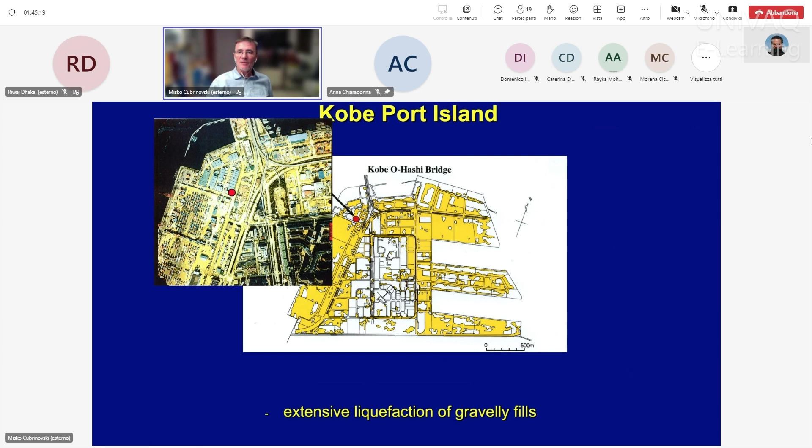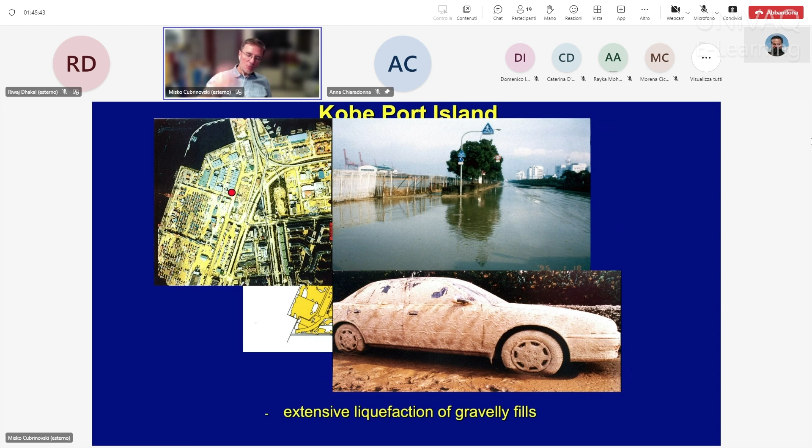This is an aerial view at this corner of the island, showing the vertical array. The whole island is really covered in yellow - it should be gray asphalt color, but the yellow indicates the ejected material, so it was all covered in soil. This is how it looked immediately after the earthquake, completely flooded with a lot of ejected material beneath the water. Because the fills are quite thick, about 20 meters, the generated excess pore pressures were very high, causing eruption of soil and water up to 1 meter above the ground surface.

There was massive settlement at the island. As you can see, this is now an elevated railway, supported on piers and piles. The piles go 40 meters deep, so the structure didn't settle, but the whole street around it settled, showing a significant offset of close to half a meter of large settlement across the area.

This is a high-rise building, over 20 meters tall, over 20 stories, on pile foundations. The surrounding fill settled but the building didn't, and again you can see those offsets. This is the entrance to such a building, where the offset is about 70 centimeters, showing huge settlement throughout the whole area, very similar to what we observed at CentrePort.

At Port Island, there were massive quay walls, about 12 meters wide and 18 meters high, and the backfill is reclaimed fill. The replaced soil was the foundation soil—unfortunately, they excavated the original clay soil and replaced it with sand. So liquefaction developed in the foundation soils and in the backfill, and consequently there was very large movement of the retaining structures, the caissons, towards the sea.

This is a summary of those movements, horizontal displacements on the horizontal axis and vertical displacements on the vertical axis. The wall movements were roughly 1 to 4 meters horizontally. Due to liquefaction in the backfills and foundation soils, there was instability and significant movement of the caissons, including deformation with sinking of the wall into the liquefied foundation sand—quite substantial and severe effects on all sorts of structures.

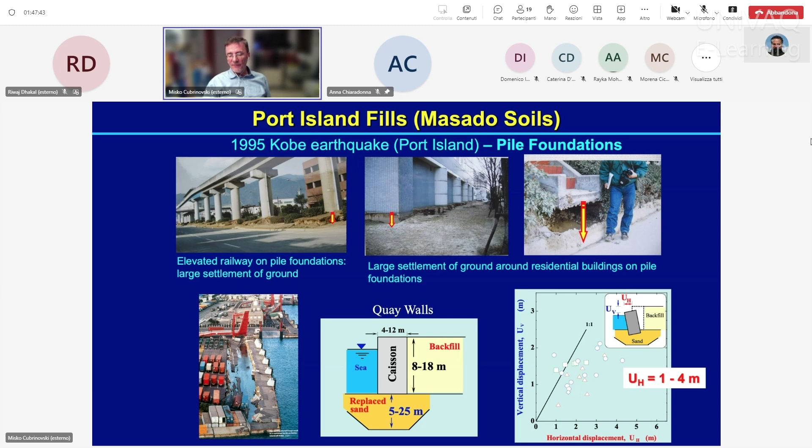And the soils, as pointed out, were very similar to what we observed at CentrePort. This gray shaded area represents CentrePort soils and these lines, while the orange shaded area represents the soils at Port Island in Kobe. Clearly a very similar composition, so everything we've said about the CentrePort soils applies to the Kobe Port Island soils.

This is the penetration resistance in those fills. The unimproved fill is this one here, with very low SPT blow counts, somewhere around 6, 7, 8, which is indicative—same as what we were seeing at CentrePort—of very low penetration resistance, because the sand and silt are the controlling matrix governing the penetration resistance, which in turn shows very low liquefaction resistance.

The red line here is the measured liquefaction resistance on in situ soils recovered in their preserved density state, obtained by ground freezing. So clearly, low liquefaction resistance is associated with those soils due to low density or low penetration resistance.

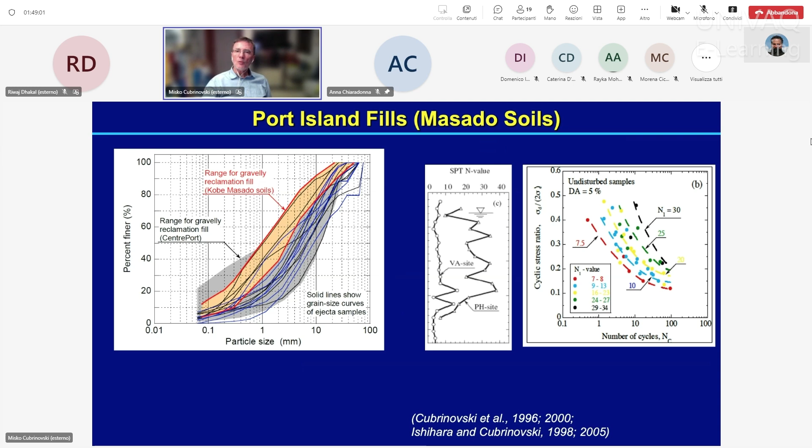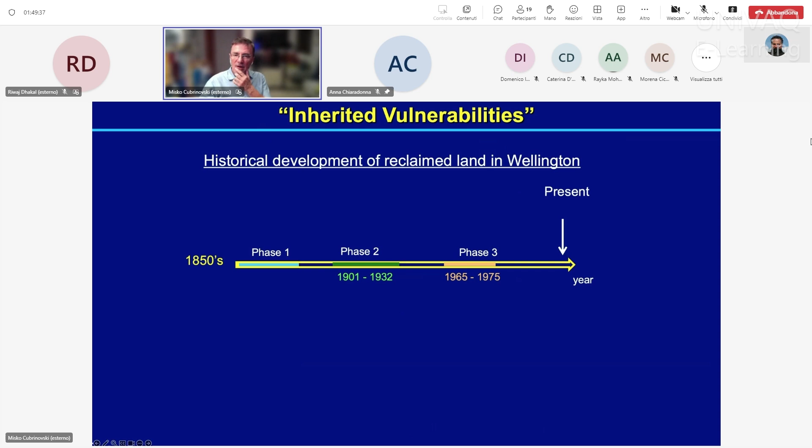You might be aware that the first significant event in which liquefaction was noticed as a significant engineering issue was the 1964 Niigata earthquake. So our methods for liquefaction assessment evolved after the 1980s, in the last 40 to 50 years or so, which is after the development of these reclamations.

This is the story throughout the world. Much of the reclamation has been developed in relatively simple ways, using liquefiable materials without any densification, and they're often placed in environments of high seismicity—meaning their vulnerability to liquefaction hazard is extremely high. We need to be aware that reclaimed land is one of the critical issues associated with liquefaction vulnerabilities: constructed fills of liquefiable materials with very low relative density, meaning that once they liquefy, they show very large deformations and produce quite significant damage to structures and facilities.

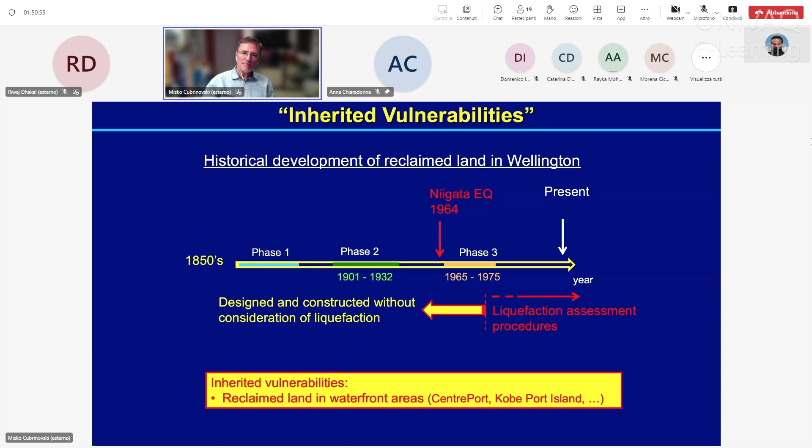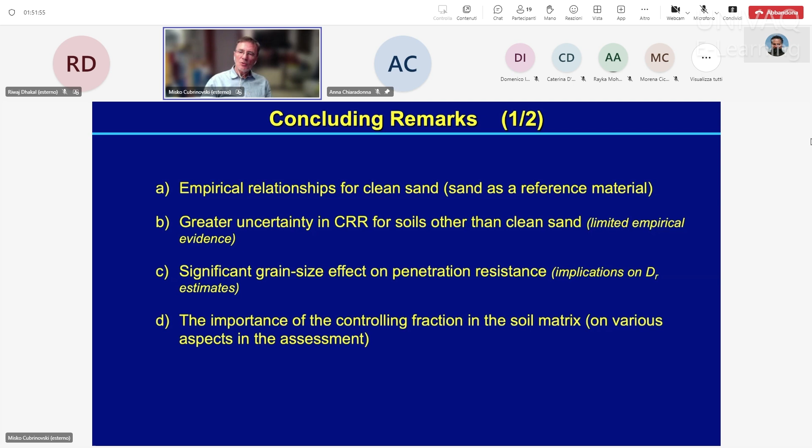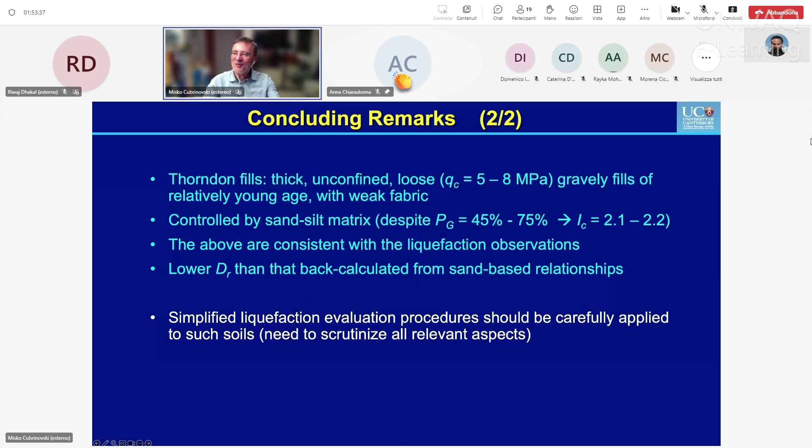I already collected some questions from the students, and I encourage other students to ask questions using the chat box, or just raise your hand. So I have just one question for Dr. Dhakal: do you think that the lateral spreading at the edge is the cause of the underestimation of the vertical settlement with respect to the measured ones?

Yeah, so the lateral spreading is more pronounced at the edge. It's not to say that it didn't propagate inland, but lateral spreading is more pronounced at the edge, and that's associated with additional settlement, or additional vertical movement as well. Whereas these simplified methods are really a 1D pseudostatic analysis, where you're just capturing settlement due to reconsolidation. So it's a different mechanism that it's capturing. If your site is free field and dominated by that mechanism, you'll get closer estimates. But near the reclamation edge, it was dominated by a different mechanism that these simplified methods cannot capture, and that would be the reason behind why we were seeing those large underestimations.